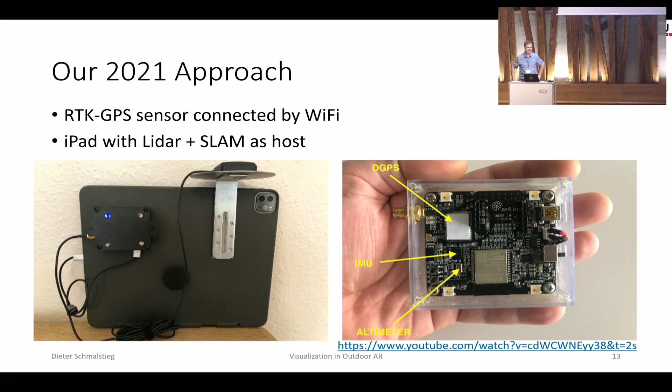But you can buy just the chips, and this is what you see here on the right-hand side. We've built a little device. We don't usually make hardware, but we built a device with real-time kinematics differential GPS and some other embellishments that is very cheap, and it talks via Wi-Fi with an arbitrary device of your choosing. So if you glue it to the back of an iPad, you get a really nicely engineered tablet capable of delivering augmented reality with self-tracking and even scanning ability, because the iPad has a LiDAR scanner, plus the global positioning. That gives a really nice result.

And then on top of that, we said we don't want to do artificial pipes anymore, like computer graphic cylinders. We want to do what they're actually doing in the field, such as virtual spray paint simulation. So the LiDAR of the iPad scans the ground, and then we paint little colored dots with computer graphics on the video, on the textured mesh that comes from the iPad scanner, for example.

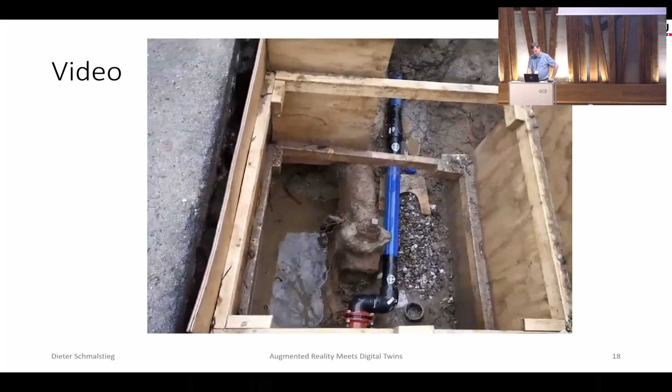And here's the thing for real. This is the captured video, and this is now after the ground has been closed, as you can see here. I think the visual quality is very convincing. At least our collaborators were happy with that.

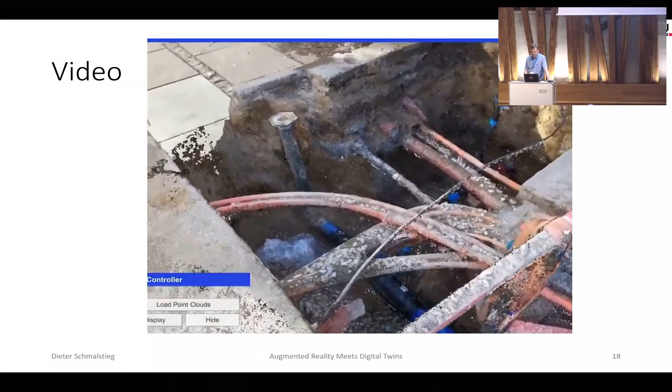The second example I wanted to talk about is a machine room in the basement, the Heizungskeller. Like I said, a digital twin can be many things.

Assume you have a modern basement where sensors have been installed for heating, water, and other utilities - you probably have that anyway. A smart meter is just a computerized power meter. When maintenance goes on, it would be very interesting to tap into this whole sensor infrastructure. And if you think about larger smart buildings or factories, there's going to be thousands or tens of thousands of sensors and sources of information.

We want to deliver this information in a situated manner. Let me explain the scenario a little bit. Let's assume you have heating or water installations and so on - always Internet of Things. These sensors are constantly communicating information. But what would you do with that information?

What happens now in factories is they have a control room where all the sensor data is collected, and there you have a visualization application running to help a supervisor make informed decisions. But when they go out to the shop floor, that information is largely unavailable, or at best you can take it with you on a tablet computer or something like this, if that even works.

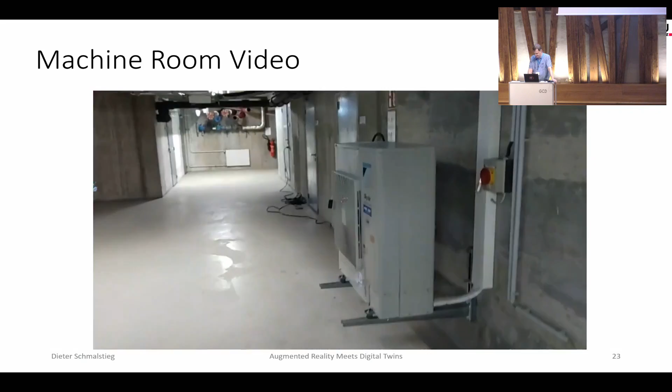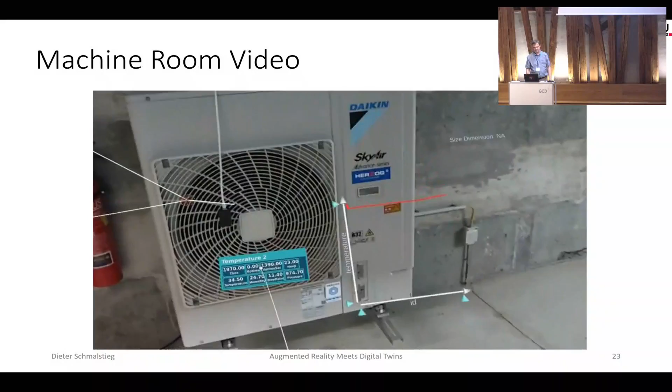Now I'll show you what that looks like. Here's my PhD student, Phil, pretending to be a janitor. He is invoking all these graphics, which are related to the various sensors that have been placed in the environment via these leader lines. Some default graphics is created, and then you can also manipulate these graphics with hand gestures—like now he's just repositioning it. As he's looking towards the next sensor, that graphics is generated and the others are minimized or removed. So it's a context-sensitive display.

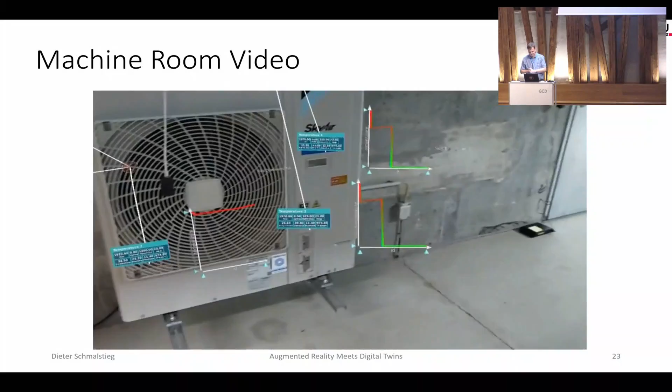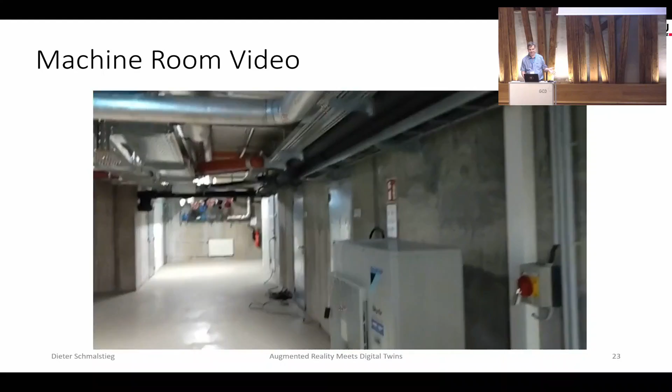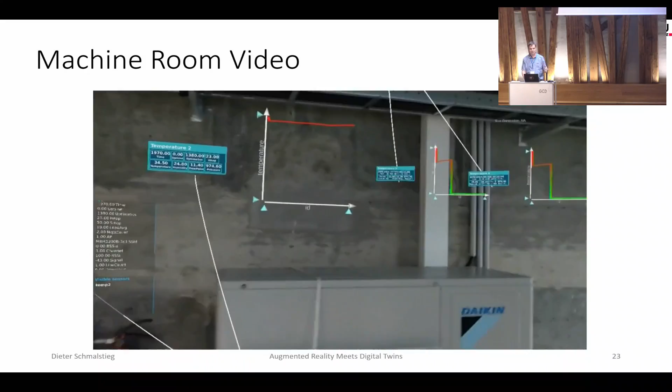It gives you access to all that sensor data, and that would work in any basement that complies with the specifications we've laid out. That's the point—there's nothing hard-coded in this application. It doesn't know how many sensors there are, it doesn't know the types of the sensors; all of that is scanned on the fly. This is the main capability that all these Internet of Things visualization applications, even for the desktop, for the command and control center, that I've seen so far, don't have.

Now, what are we seeking? We're seeking to deploy situated visualization and analytical capabilities on a large scale, outdoors or indoors, but definitely away from the office, and for lots of data, because this data that we have in digital twins, be it building information models, geographic information systems, construction information, is just getting more and more updated at increasing higher rates. I would say there's an age of big data now also in the AEC field, in the built environment. And the people who deal with these data collections want to form digital twins. My argument is that this also lends itself to AR, and we can make working systems now that deliver context-dependent visualizations via augmented reality at a task location anywhere in the built environment.